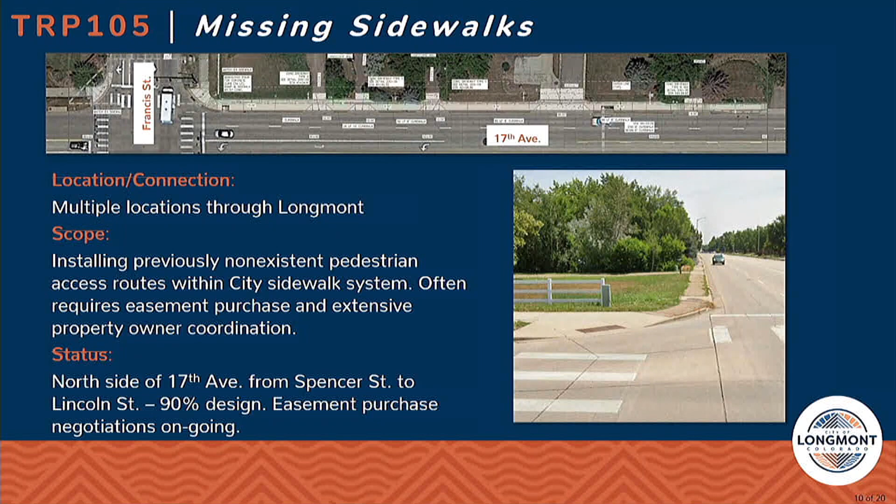As Phil mentioned, my name's Tom Street. I'm with the Public Works and Engineering Department. Our 17th Avenue sidewalk reconstruction project is currently in progress. Construction started approximately 3 weeks ago. The limits of the project are along the north side of 17th Avenue from Spencer Street going east to approximately Lincoln Street.

This is a replacement project. The existing sidewalk is an asphalt sidewalk that's been in place for many decades. It's deteriorated, distressed, in very bad shape, and we're replacing it with a much wider concrete sidewalk. Design took some time - there were about 18 different parcels where we needed easements and right-of-way, so the acquisition process took 18 to 20 months.

But we've finished all the design and right-of-way work. The project went out to bid during the second quarter of this year. We opened bids and got a fairly competitive bid from our low bidder, a company called Stone and Concrete. Total cost of the project came in at $820,000.

We expect most of the hard improvements will be constructed this year. We anticipate we'll probably need to come back next spring to finish up the irrigation and landscaping work. Any questions for Tom? Very excited about this project finally getting underway and hopefully done.

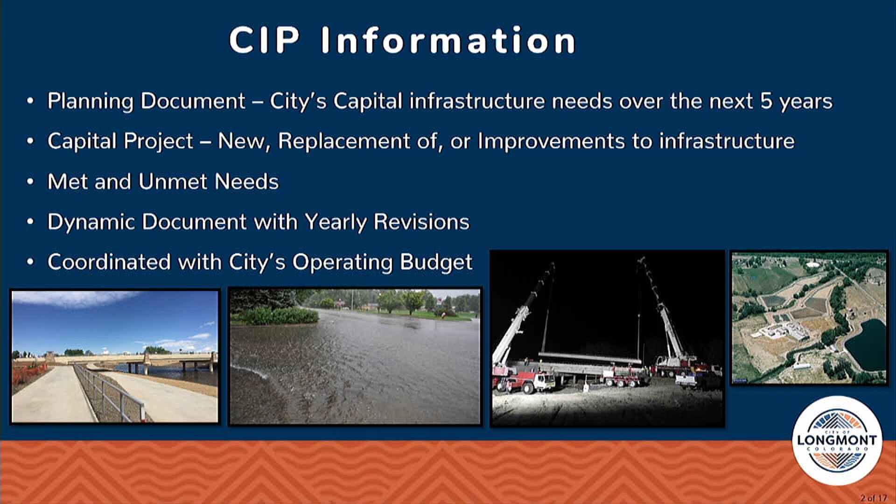One item to note is that even though our CIP is a 5-year planning document, when City Council reviews all of our CIP projects this September and moves forward with budget approvals in October, only the expenditures for 2024 would be approved at that time. So even though it's a 5-year planning document, expenditures are only approved one year at a time.

Staff will use a variety of information to help determine which projects go into our CIP. At the highest level is our Envision Longmont document, our comprehensive and multimodal plan. The overarching goal of this plan is to develop a complete, connected, and balanced transportation system throughout Longmont. Staff also uses a variety of other master plans and studies, such as our Storm Drainage Master Plan, our Parks, Rec, and Trails Master Plan, and the Longmont Roadway Plan. So a lot of guiding documents are used by staff to determine which projects go into the CIP.

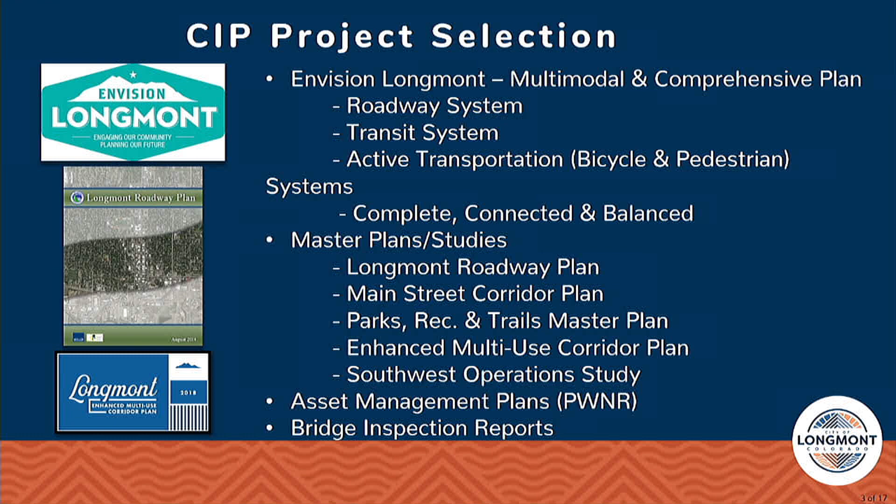Staff also uses various asset management plans to guide which projects go into our rehabilitation program. We'll also use bridge inspection reports that we receive from the state every 2 years. These reports help guide which bridges need repair and which need to be replaced. And of course, funding is always a consideration in selecting projects.

In Longmont, we have 2 dedicated funding sources for transportation. The most critical is our 3/4 cent street fund sales and use tax. This tax was initiated in 1986. It was originally set up to maintain and improve our street system within Longmont. Since that time, it had been extended 6 times until 2019, when it was permanently extended.

The second funding source we have in Longmont for transportation is our Transportation Community Investment Fee, or TCIF. This is a fee that has restricted uses. Per our municipal code, it can only be used on arterial street and intersection improvements. This fee is levied on new construction, and these fees are collected at the time when building permits are issued.

But again, when it comes to funding transportation in Longmont, our street fund sales and use tax is by far the most important, the most critical revenue that we have.

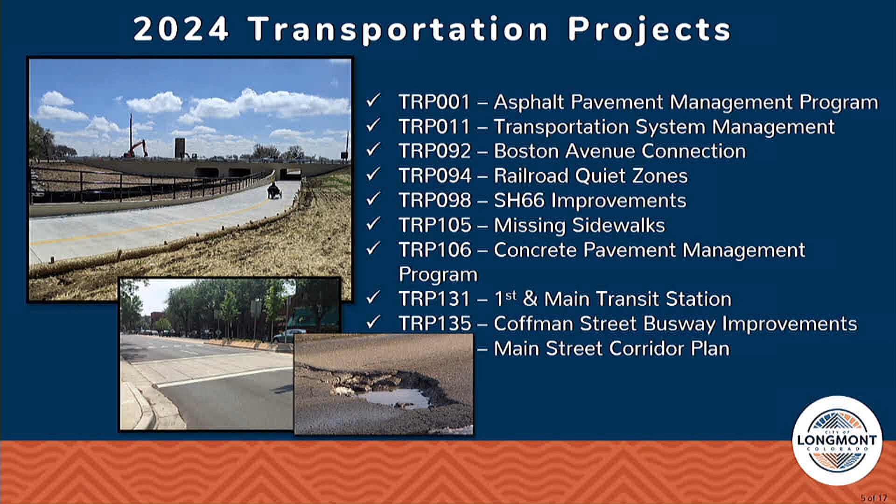In our upcoming CIP from 2024 to 2028, we have many different types of projects. We have bridge projects, asset management projects, multimodal and alternative mode projects, and safety projects. But our focus for tonight is going to be on projects that have a funding request for 2024. All of the projects you see on this slide are projects that will be presented tonight.

The information on this slide was included in the TAB communication. It shows a couple different things: the proposed funding, the funding being requested by staff in 2024. Funding coming from the street fund is coming in at just over $15.6 million. Funding being requested from TCIF is coming in at just $400,000. So the total staff request for funding from these 2 sources in 2024 is just over $16 million.

The first project we wanted to talk about is TRP 001, as it's identified in the city CIP. This is our asphalt pavement management program. On a yearly basis, this program will have 5, 6, or 7 different projects. We hire contractors, heavy highway civil contractors, to perform all of the work. Projects may range from pavement rehabilitation and concrete repair to pavement preservation projects such as crack sealing and chip sealing.

The goals for this program are listed in the lower right corner of the slide. One of the chief concerns of staff is that we are always trying to design, construct, and maintain all of our transportation improvements in a fashion that results in the lowest possible life cycle cost for that infrastructure. We like to make data-driven decisions, using our pavement management software and related tools to determine which projects go into these rehabilitation efforts. Equally important to us is our effort to build credibility as good stewards of our limited public funding. Asset management truly is a core responsibility for our staff. We have over 357 centerline miles of roadways in the city, and the lion's share of maintenance and rehabilitation completed throughout Longmont is completed within this program.

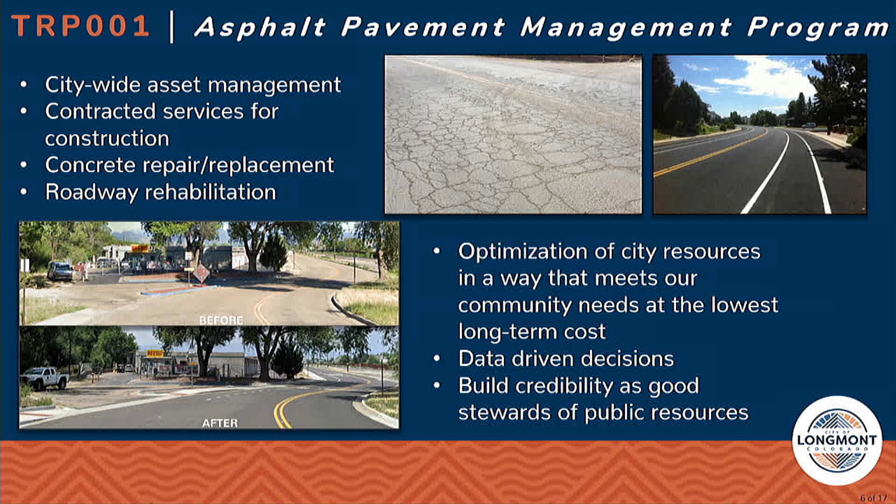Our next project is TRP 011, our Transportation System Management Program, or simply TSM. Again, this is another program that on a yearly basis will design and construct several projects, ranging from ADA improvements to neighborhood traffic mitigation projects to safety projects to alternative modes. Tonight we wanted to mention 4 efforts that will see a focus in 2024.

First, I wanted to mention 2 projects on County Line Road. Our first project on County Line Road will widen the road from 17th Avenue up to Colorado 66. The widening of this roadway will accommodate buffered on-street bike lanes. Also included in the scope of this project is pavement rehabilitation and various drainage improvements. This project is currently under design.

We expect in 2024 that we'll finish the design effort, acquire all needed right-of-way and easements for the project, and this project is slated to start construction in 2025. We also received just over $3 million in grant funding for this project, and Phil has done a great job bringing in that state and federal funding.

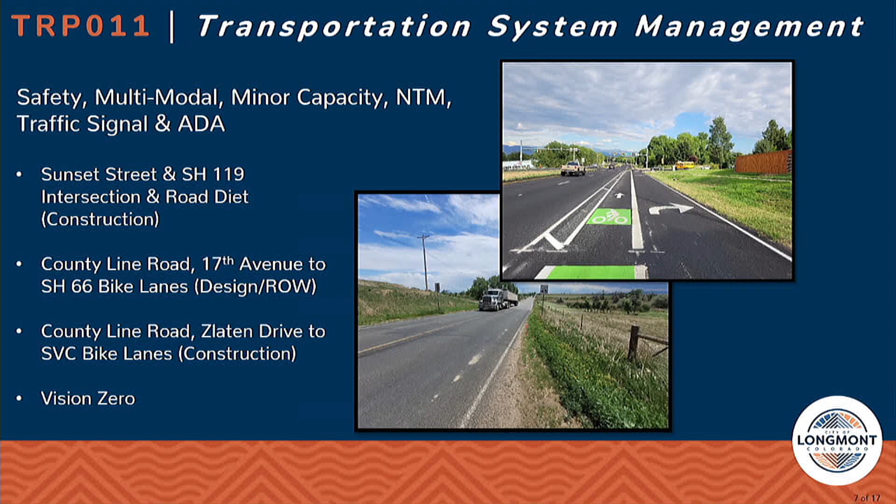Board Member Wickland: Thank you, Tom. Back on the Sunset Street, could you just define what a road diet is? Just so everyone knows, and anyone watching on YouTube knows.

The road diet is really an extension of an effort we started several years ago on Sunset Street. Essentially, you have a 4-lane roadway, 2 lanes each direction, no center left turn lane. Our first effort, several years ago, converted those 4 travel lanes to 1 travel lane each direction with a center left turn lane and on-street bike lanes. That initial effort was completed from Pike Road up to Kansas Avenue. Our next effort will extend from Kansas Avenue to Nelson Road, again converting the 4 travel lanes to really 3 travel lanes with on-street bike lanes.

Okay. And then I guess my general question is, and I know hopefully with the task force we'll be looking at street design standards as well, but is a center turn lane justified for also other uses? Meaning, where maybe the center turn lane is 10 to 12 feet wide, that space could be used for other purposes, or a greater buffer for a bike lane, et cetera. I'm just trying to understand how we can look at street design standards in the future.

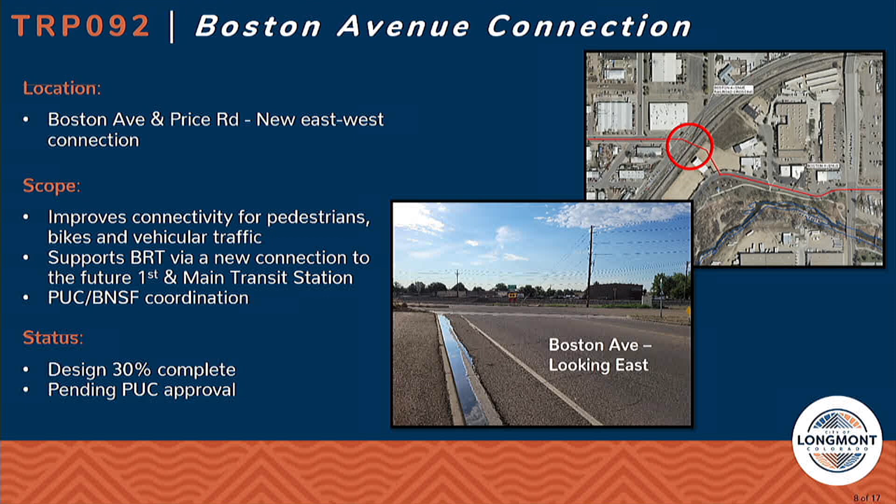The funding request for 2024 includes the lion's share for construction costs, as well as some design funding and right-of-way acquisition funding. Again, the right-of-way acquisition would be contingent upon approval of the PUC application before we'd pursue that. This project, crossing the railroad tracks, will be constructed as a quiet zone project, which ties in well to our next project, TRP 094, railroad quiet zones.

This project addresses numerous locations throughout the city with existing crossings. The first package includes 3rd Avenue, Longs Peak Avenue, 9th and 17th Avenues. The photo provided is not a Longmont quiet zone, because we don't have any fully compliant quiet zones in Longmont right now - that photo is actually in Boulder County. But the intent of this project is to construct quiet zones at all of our crossings throughout Longmont. Status: this first package was submitted to the PUC for approval and was granted.

We are looking at potentially going to bid for this project in the relative near future of this year, with construction potentially starting late this year or early next year. The second package is currently under design, and the funding request for 2024 largely addresses that second package and subsequent packages beyond. The funding for the first package has already been secured, so this is a continuation of crossings beyond what's listed in that first package.

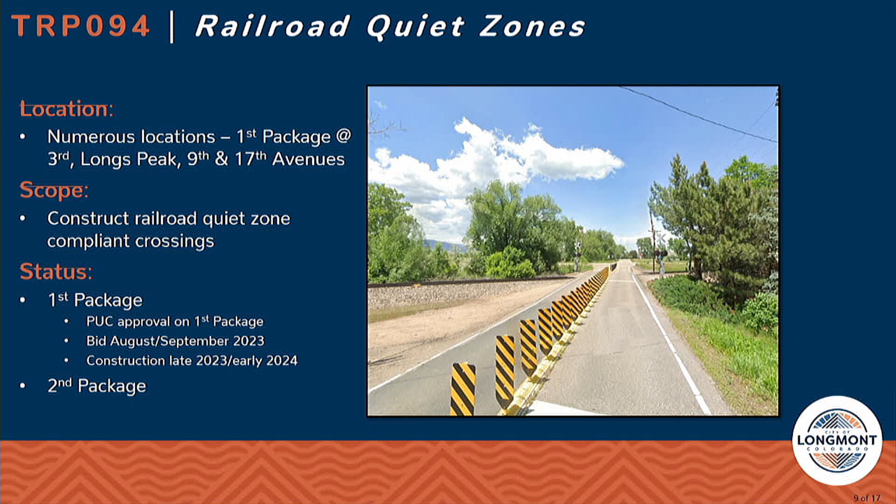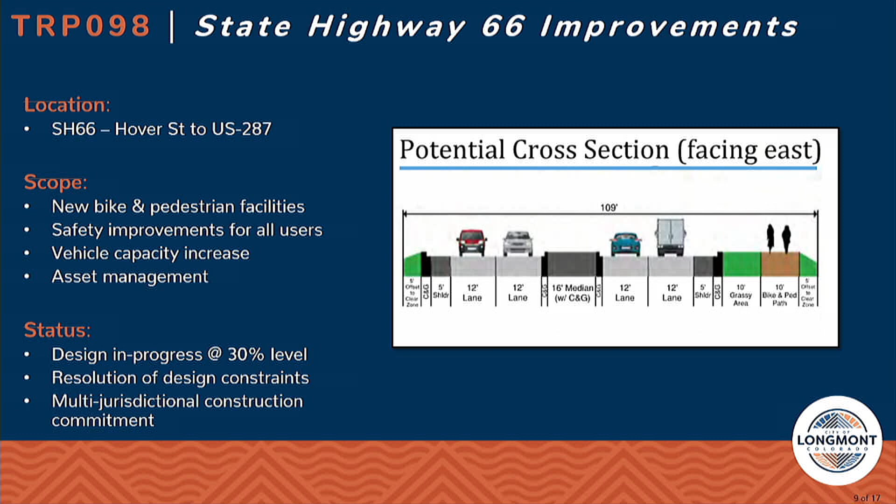Second project, TRP 098. Hang on just a minute. Board Member Wickland has a question. Oh, you have me. I'm sorry, I do have a question. Board Member Burrows has a question. Could you go back to that slide?

So the way this works, obviously we don't have anything like this right now. Would we expect to see this type of barrier all along the road in the quiet zones in Longmont? It really depends on the intersection at hand and the configuration of the existing lanes. That's one method to channelize traffic in a particular way. By and large, I think we're going to be using raised medians for that sort of protection. I don't think we have any cases where we'll have this scenario with raised barriers, but if there's confined space at a particular intersection, it may be warranted. As we continue to work through the design packages, second package and beyond, it may be something that would be warranted, but right now I don't think that's the case.

So the railroad would be raised up? Am I understanding that right, so that it would slow down the cars? Is that what you mean? The crossing itself would stay at grade with where it's at right now. Okay, so for the cars approaching, they would be raised? It would be at the existing elevation of the roadway. No, it would not necessarily be raised. Okay, I guess I'm not understanding.

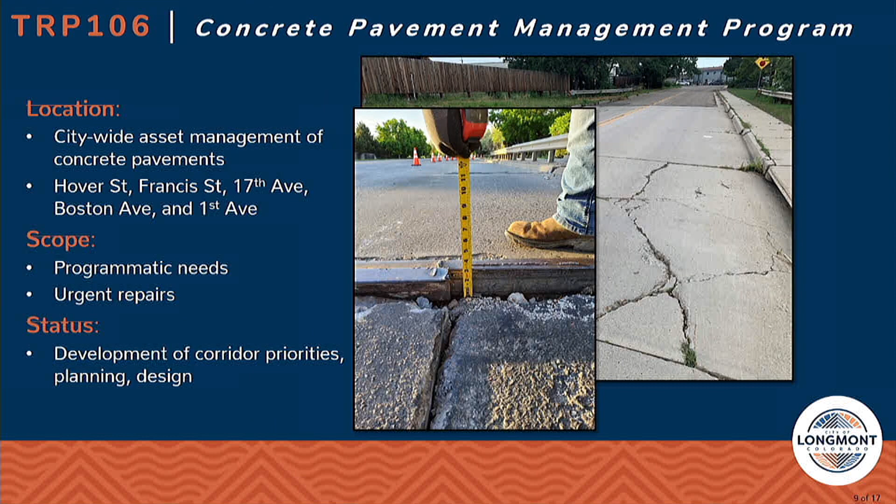Any questions? Yeah, it was actually about the last slide, the one before.

From my understanding, the pedestrian and bike path is going to be a new addition to that section, right? That's correct. So is there a plan for how those pedestrians and bikes will be able to cross over to all those streets that come in and out of that section? Because right now there's no crossings, so how are they going to access all the different roads that go through that section?

That's a good question. I don't think I personally have an answer. Tom might be able to expand on that. Are you referring to trying to cross over to the north side of State Highway 66?

Yes. Again, the extent of this project really starts just west of Main Street and extends over to a point just east of Hover Street. So there's currently two signalized intersections at Hover and Main Street that would provide an opportunity to cross over. Between that location, there is a future signalized intersection planned for Francis Street, so at some point in the future, when development occurs on the north side, there would be marked crosswalks that signalize the intersection, providing access across State Highway 66 at that location, if that's what you're asking.

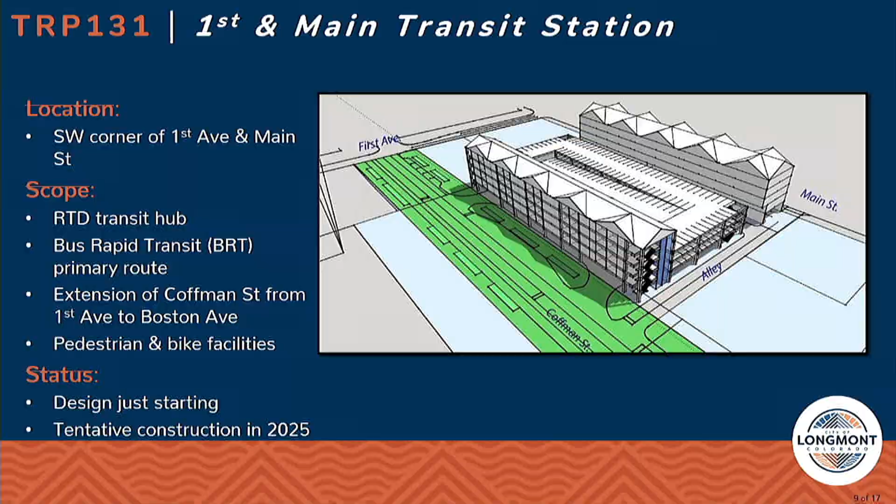The $16.4 million must be spent on FasTracks infrastructure for transit only. So they're going to be buying up the construction of the parking lot you see, the multi-deck parking structure, as well as, though you can't see it, the very bottom level, much like the downtown Boulder station, where the buses will be underneath. They're responsible for all the pieces of transit connecting to a future rail someday along First Avenue, along where the tracks are. That was the deal brokered with RTD at the time: since we weren't getting the rail, give us some portion of the FasTracks dollars to build something for transit in this location.

What are the two taller parts of the structure that are on either side of the parking deck?

Those are really the redevelopment aspect associated with this block. Jim mentioned we're already doing property acquisition—you've probably seen a lot of those come through council, where we've talked about purchasing property. We have all the property either under contract or purchased at this point, and we're working to find a redevelopment group that will build those sections, mostly mixed use of residential and commercial.

Okay, thank you. Okay, let's continue.

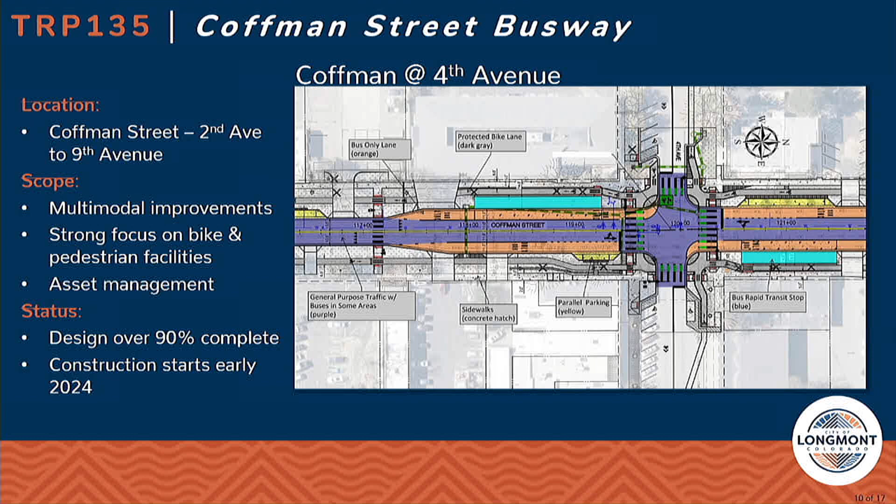The way that would be accomplished, at least in large part, at 4th Avenue and Longs Peak Avenue, would be via a protected intersection, an example of which is shown here. This would provide much higher visibility for pedestrians and bikes using the intersection in all directions, and would also lower the crossing distance on Coffman Street and the related cross street.

So this is a great type of design for those who are uncomfortable or not as confident while riding bikes, and that's really a large intent with this project—to make it much more comfortable for those who are not strong, confident riders, but who want to make it to downtown with their family. Beyond those multimodal improvements, this also includes a strong asset management component.

The distressed asphalt on Coffman Street, from 2nd Avenue up to 9th Avenue, is in need of full reconstruction at this point, and this project will also address that. Our design is currently over 90% complete, and we're looking to wrap that up within the next couple of months, if not sooner.

We're looking at releasing this for bid later this year as our ideal timeframe, with construction starting in early 2024. So there is a balance of funding we anticipate needing to support this project in 2024, a little bit of additional funding that we're asking for.

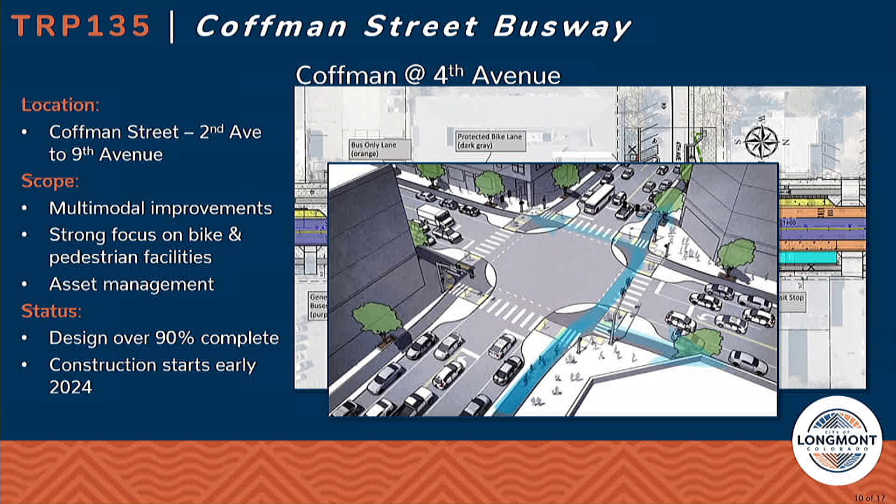I am very excited about this project as a bicyclist. Great to hear, so I'm looking forward to it. I have a couple of questions.

I'll start with the picture right here. I really like seeing this type of intersection because I think it's much more friendly to multimodal. I'm wondering, in terms of the timing with the lights, you have pedestrians and bikes waiting to go through—will they be given priority at this intersection, or will they still have to wait for cars?

Our current plan is to have the primary street on Coffman Street act in a recall mode, so that while cars have a green light north-south, or buses have a green light north-south, pedestrians and bikes would also have that. We are going to be implementing a bike detection zone, and notification via signage and a blue light indicator for those using that intersection.

Cross streets—I don't know if there's any additional items that Kyle may want to share on that, but we haven't gotten to that level of detail yet. Do you want to add to that, Kyle?

Yeah, so as Alan alluded to, we'll be having dedicated detection for pedestrians and bicycles. Starting with pedestrians, we will have leading pedestrian intervals to safely give pedestrians a head start on crossing before cross traffic turns green. We'll also be implementing a new detection system that can physically identify how many and what location pedestrians and bicyclists are on the roadway. It's a great way to get counts, see when people are crossing at what areas, and it gives us opportunities to have more flexible crossing times for different pedestrian abilities.

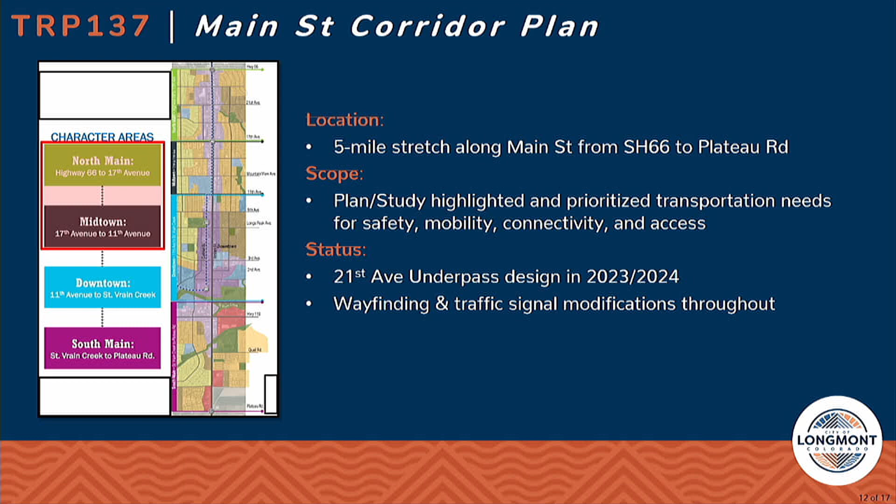So, another opportunity for more questions before we have one more slide for you this evening.

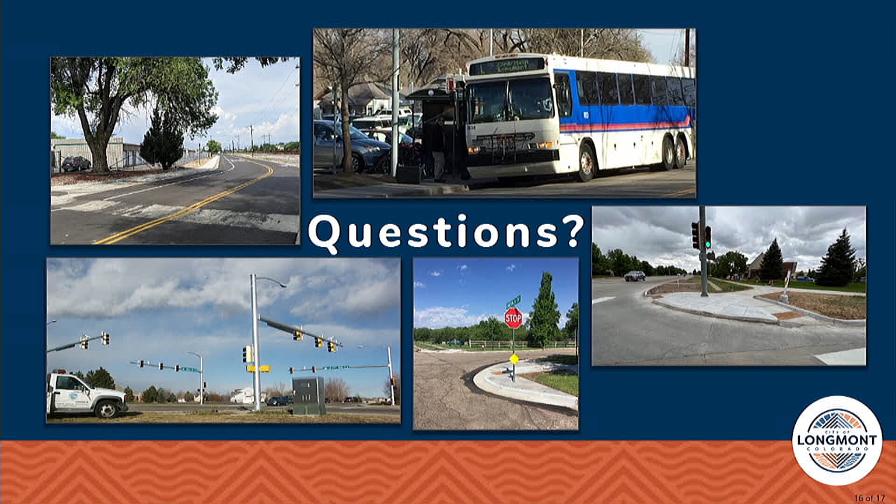I can't find it now, but I remember north of 17th was mentioned for mid-block crossings, as recommended, because I remember being part of a presentation on significant pedestrian risk or crashes along that corridor.

We are currently working with RTD as part of that bus rapid transit project that would actually go all the way up to State Highway 66 and Main Street. There's a planned park and ride up there that they're working on building - that's all an RTD project, all their money, all their planning efforts. But as that bus rapid transit comes down the corridor, there are certain stop locations that would need mid-block crossings to operate, because we can't operate that bus rapid transit as close to the intersections as we'd like. So they are looking at mid-block crossings, and we've been out with Kyle and Caroline working with RTD on where those locations could be. We've identified 2 specific ones that are north of 17th and north of 21st.

Is CDOT on board with all that? They will be. They are on board because they are part of the bus rapid transit program and project, so they understand. In fact, they are spearheading a study along all of 287 that shows Longmont being by far the worst crash location for pedestrians and bicycles, which makes sense since we're the only real city with density there, and so many people trying to cross, and so many apartment buildings and shops along our portion of 287.